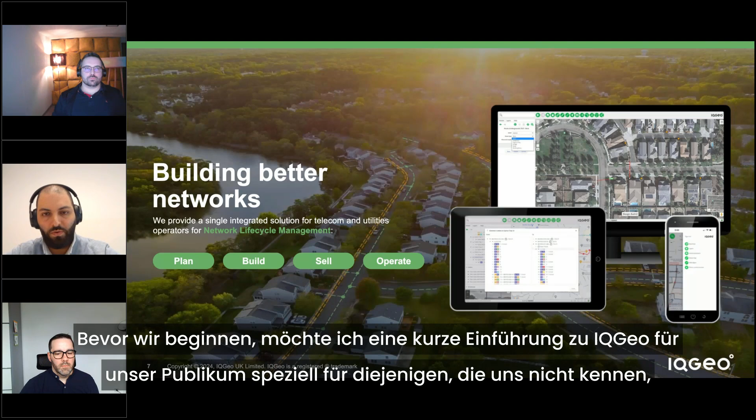Before we start, I would like to give a short introduction on IQGeo to our audience, specifically for those not familiar with us. Our vision is to empower operators and engineering services companies in the telecom and utilities industries to build better networks. With the innovative products we offer, a truly single source of truth on one platform, we cover the whole lifecycle, from planning and building to eventually selling services and operating the network. In numbers, we are proud to serve more than 450 customers with more than 150,000 users across our portfolio of products, and with more than 200 staff in 8 offices across the globe. Our global network of experts is always trying to find innovative ways towards building better networks.

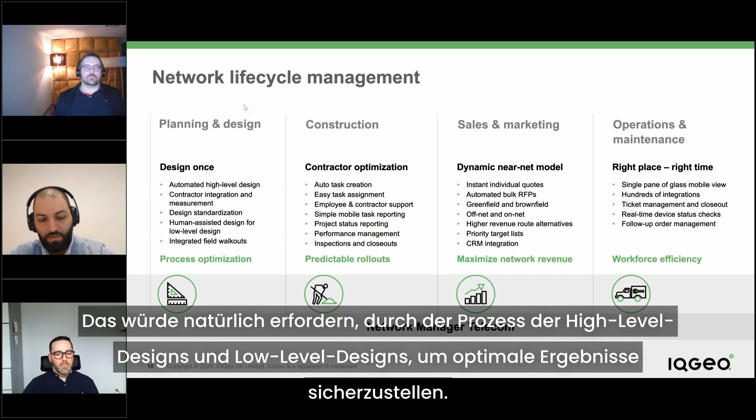When we talk about the life cycle of a network, we have different vantage points to consider. Starting from the plan and design stage, the drive is to, as much as possible, design the network once. That would require going through high-level designs and low-level designs to ensure optimal results, essentially creating a network that can be built as effectively as possible.

Transitioning to the construction stage, having predictable rollouts in collaboration with contractors will ensure a speedy and efficient build, and most importantly, accurate documentation of the network that was built. This will eventually enable the network to perform its main purpose, which is to provide services to clients and customers, maximizing revenue, which is key to operators.

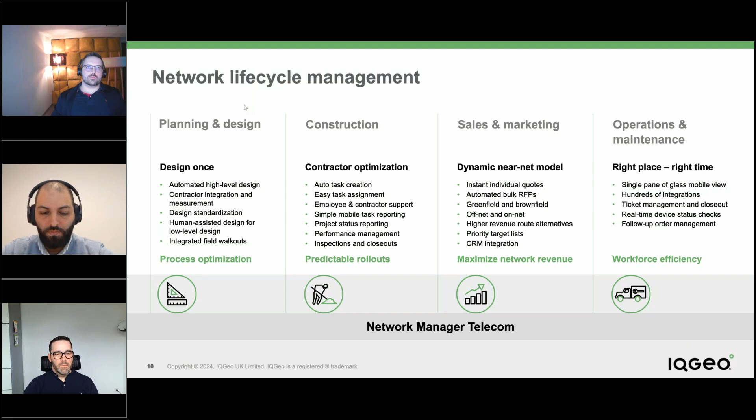And last, and most definitely not least, operations and maintenance are essential to keeping clients happy and benefiting from digital equity. For all those pillars, we at IQGeo have Network Manager Telecom. With that short introduction, I will pass it on to Jakob and Christian to take us through their presentation.

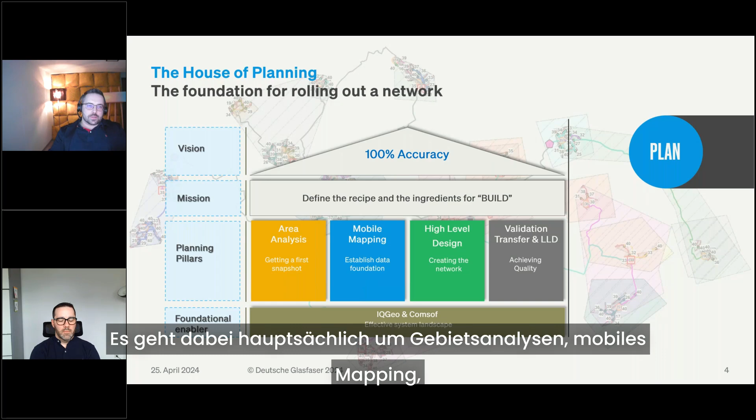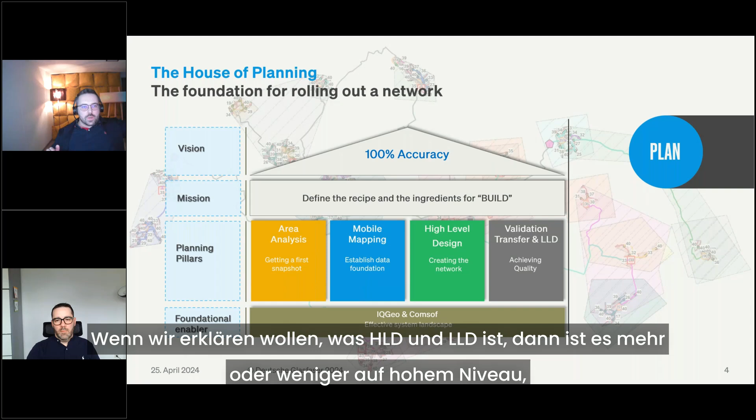It's mainly area analysis, mobile mapping, high-level design, and validation and transfer, and also the low-level design. When we explain what HLD and LLD are, it's more or less about the level of detail - HLD being high level, and LLD being a really detailed network plan.

But to build a house, a good foundation is needed. So we work with IQGeo and Comsof as a good, effective system landscape. Our main vision for this part is 100% accuracy.

Maybe one or another is asking, well, isn't that possible? Yeah, it may be possible, but through the process, a lot of stuff can happen. You have difficulties, adjustments in the network or other parts that hinder you in getting the accuracy. And maybe also the lack of digitalization in Germany is also one point.

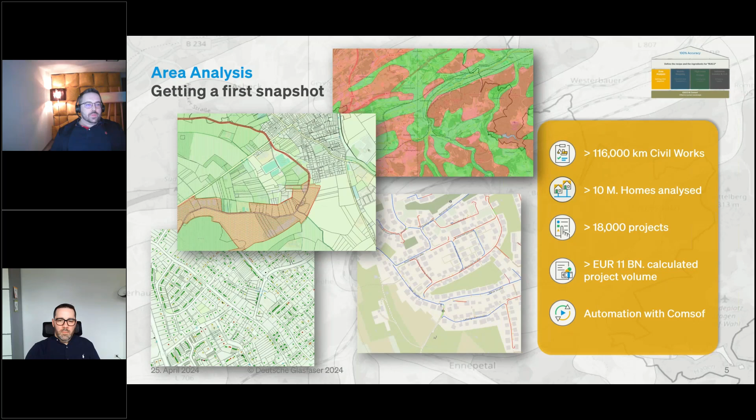But we operators do a lot to improve that where we possibly can. So what would we start with? Area analysis. What is useful to take a look into?

Here you see a few example pictures. It could be, for example, soil classes. Soil classes define the underground, and when we use, for example, horizontal drillings, it's really important to know and face the soil classes, because that can give a big idea of how the costs could be. Also important are natural reserves, water areas, or similar reserve areas, which can cause higher costs.

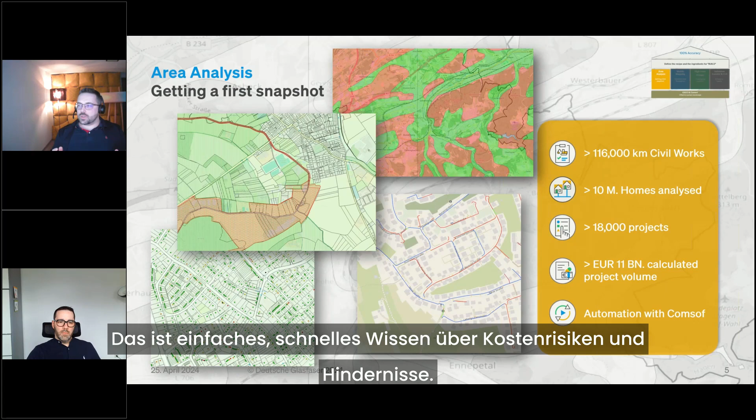And why are we doing that? That's easy - fast knowledge about cost risks and obstacles. So we have a first rough idea of whether we want to go into that region or not.

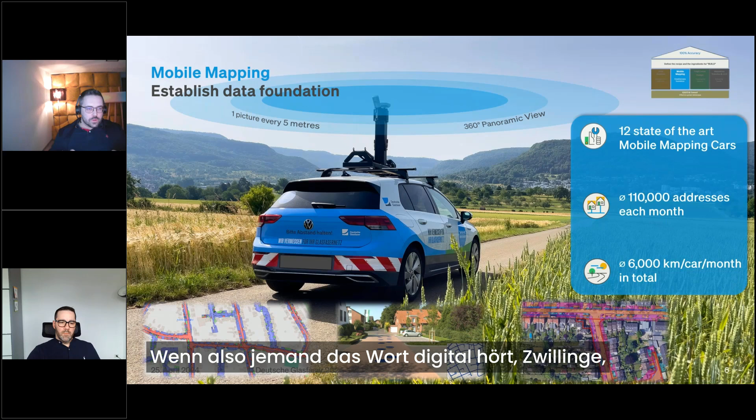Mobile mapping: with our 12 cars, we are creating terabytes of data. When you drive around 6,000 kilometers, the disk is full pretty fast. And maybe if someone heard the word digital twins, we can create a digital twin with that data to gain precision in our network costs.

For example, the knowledge about the surfaces, you can see an example picture, can give an idea of around 80% of the costs of deploying a network. So really a big amount to already have a picture of.

You can also use the data to build artificial intelligence, recognizing this and even more, like gas line locations, sewers, and other obstacles, which help determine more extra costs. Why digital twins? The possibility to take all needed field data into consideration without going there several times in the process chain.

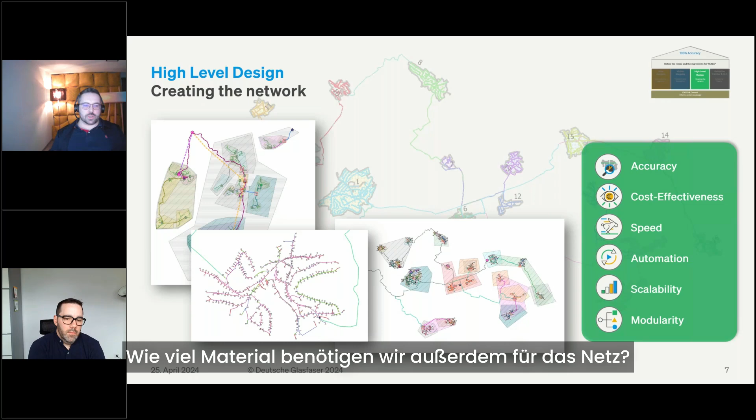High-level design: now we start using that data. We want to have the idea of the material list, like a bill of material. How much material do we need for the network? One aspect was the civil works.

Now we go into detail. I learned about different ways of processing HLDs, and in the past, my personal choice is really doing it automatized in-house. We have, as I mentioned, the foundation with Comsof and IQGeo.

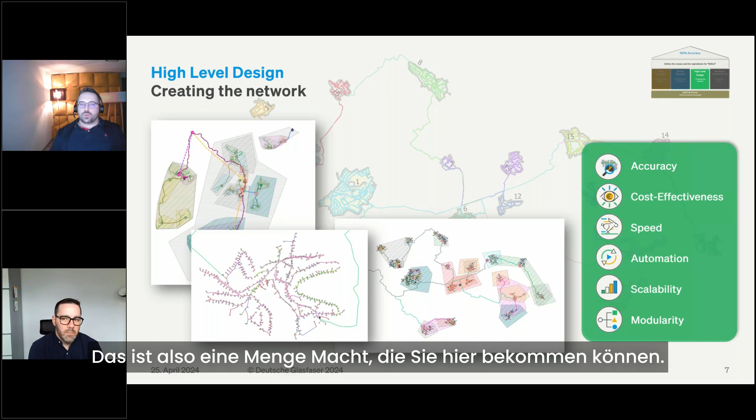With good software, you can set the rules how you want it in a modular way. You can scale your output efficiently and gain speed based on your goals. But you still have the possibility to try several versions of a network if needed. So that's a lot of might you can get here.

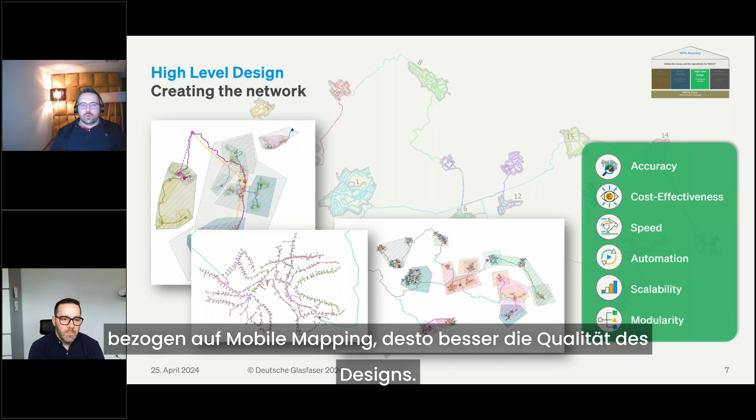Lots of manual work is not needed anymore. And the better the input data, referring to mobile mapping, the better the quality of the design. So why high-level design? It's an automated way to use collected data as input and generate a really good first estimation of the price for a project.

Going to the last part, validation and transfer. While going into the rollout direction, we implement last details to the design, which were not necessary in the early status. And to keep it simple, we use Comsof and IQGeo to transfer the data quite seamlessly. That is also a big advantage, not having to work with several interfaces between several systems.

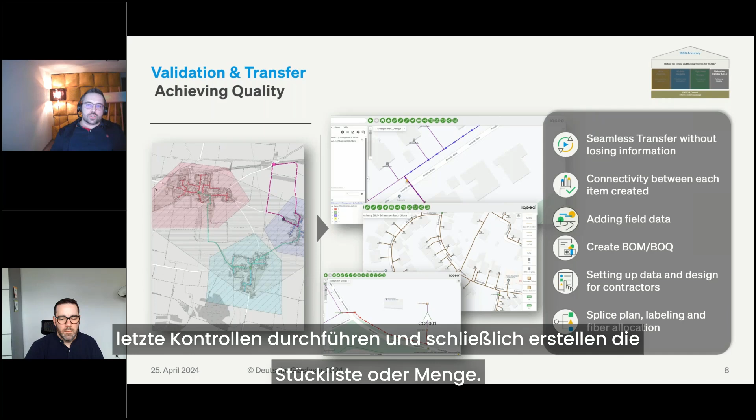We can add field data here, like third-party infrastructure, making last checks, and finally create the bill of material or quantity. That's nothing more than, let's say, the ingredients for the FTTH network. So why validating? Having a last checkpoint for quality and adding details is necessary.

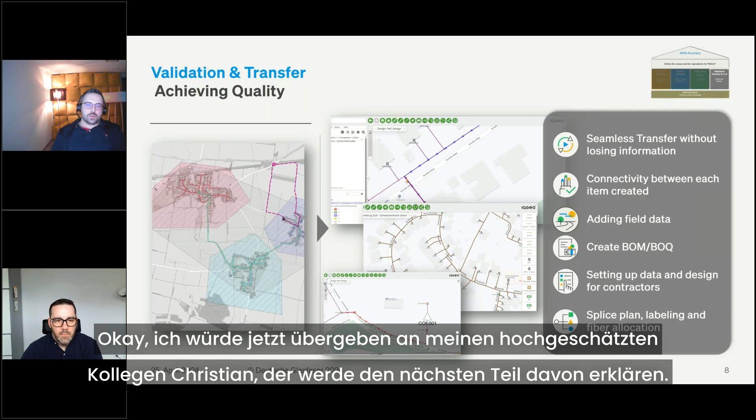So I hope I explained the first house of planning relatively okay. I would hand over now to my highly esteemed colleague, Christian, who will explain the next part of it. And of course, feel free meanwhile to already put in your questions if you have any.

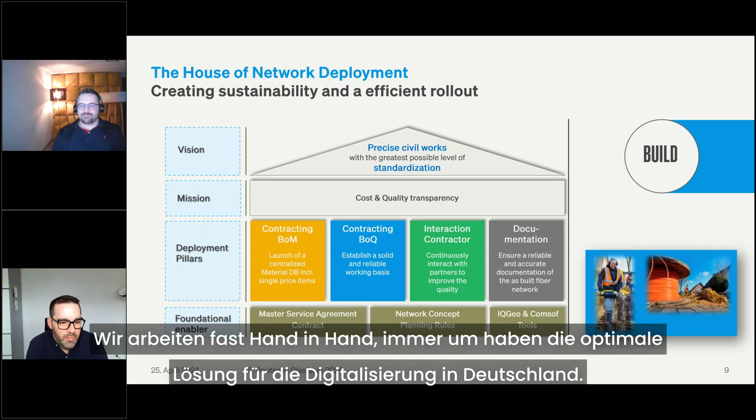Yes, thank you very much, Jakob. We are working nearly hand in hand, always to have the optimal solution for digitalization in Germany. And by having a good plan, which Jakob showed, we have to deploy it. The way we want to deploy it in Deutsche Glasfaser has completely changed in the last years.

Our vision is to have precise civil work with lots of standards. The mission is to have a cost and quality transparent network built. We have 4 pillars here. Jakob mentioned that we will have the ability to have a BOQ and a BOM.

We know which quantities of civil works we need in detail, where and how many, and we also know it on material. That's a main important aspect. It's a big benefit from IQGeo, which we are using right now.

We have a passive material database, which will be shown by Anthony afterwards. It describes not only, for example, a 96 fiber cable, which Jakob is planning, but also the cost for having the calculation on how much it costs to have the network rolled out. And we will also have things like data sheets, how to handle it, installation manuals for our contractors directly linked in this tool.

And we have the attenuation values, which show what is the whole attenuation between your active POP, for example, and the customer, to have a look at whether the technology you want to provide on this network fits.

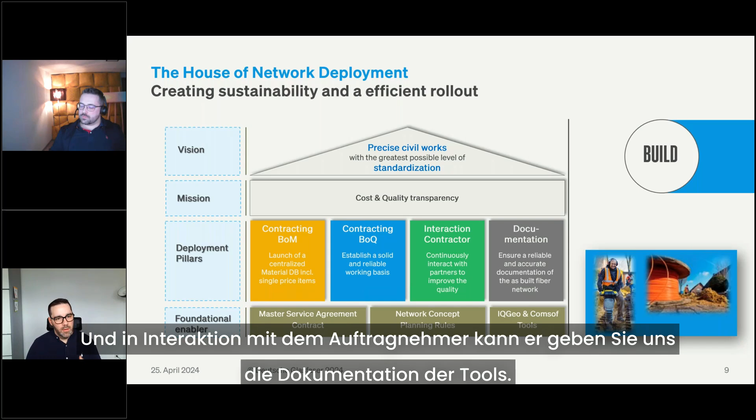We can place orders for the projects based on that and interact with the contractor. He can give us the documentation out of the tools. We don't need extra employees at our general contractor going on site to do documentation. It can be done by the people on site with a tablet, and they have AI-based checks, validation, acceptance checks for Deutsche Glasfaser, which makes it very easy for the general contractor and Deutsche Glasfaser.

And we save a lot of capacity of people to do on-site reviews or reviews of documentation which has been handed over. We have several rules for our network concepts. For example, in Germany you have state aid projects for open access. Then we have B2B customers, B2C customers, mobile sites.

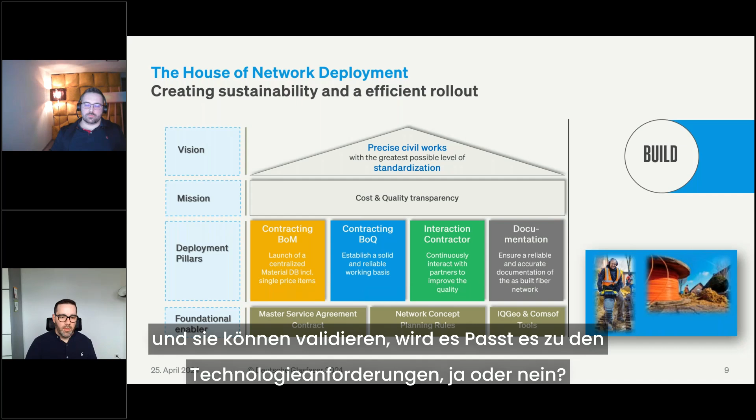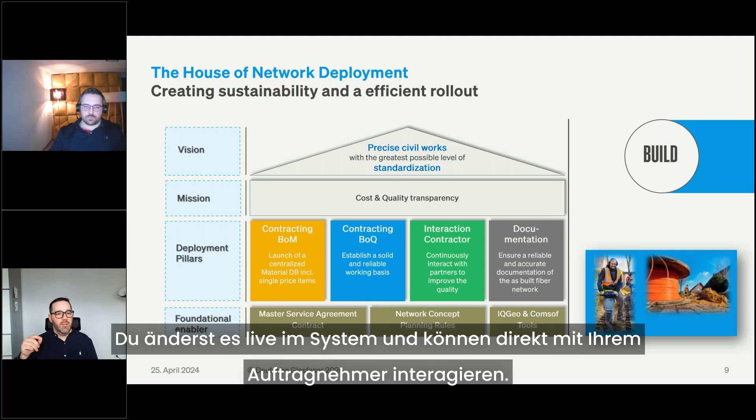With all these planning rules, Jakob is able to plan together with his teams the perfect solution, and they can validate whether it fits technology requirements, yes or no. And when there is a small adjustment, for example in the low-level design phase, the municipality asks you to go on the other side of the street, you can change it live in the system, you don't have to change it manually. You change it live in the system and can interact with your contractor directly. That's a real benefit as well.

That gives us a very good base of documentation after having all these acceptance tests, to go to the house of network operations. In network operations, when you have your documentation of the network, you have all the values of how the network should look like. You have your acceptance test and the optical test patterns, which Deutsche Glasfaser is rolling out right now, to have a live view on each fiber, to have all the values available.

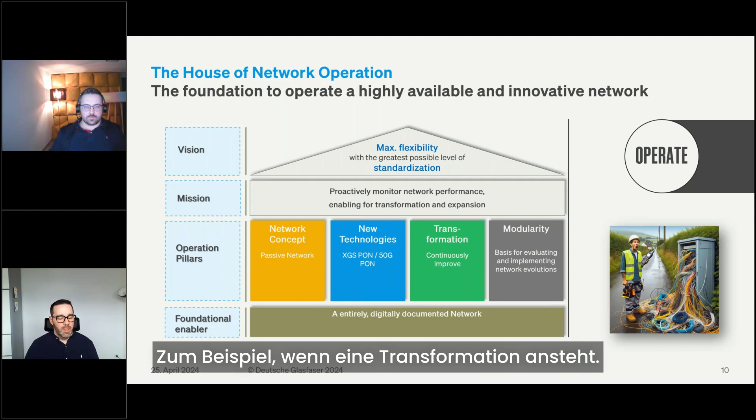You see the life cycle of the cables, you see the life cycle of all the connections you have in your network. And you're able, together with this data, to check for new technologies. For example, when a transformation is coming - in the past there was GPON, right now there's XGS-PON, maybe next is 50G-PON - you have a database which gives you the correct information on what is feasible in this network.

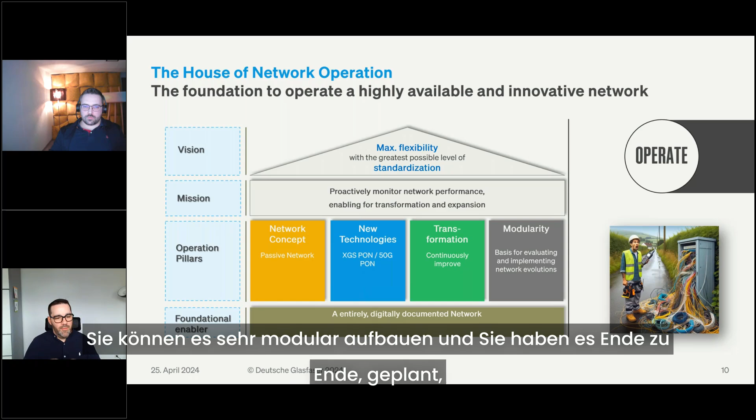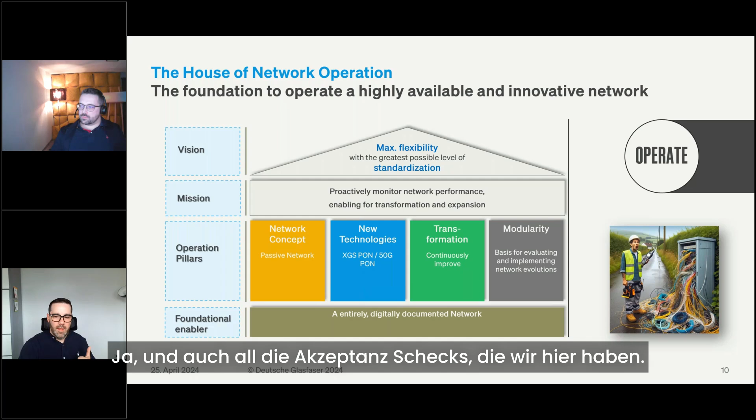And so you can continuously improve your network, and you can build it very modular - again state aid, maybe B2B with point-to-point solutions, mobile sites. You can build it very modular, and you have it end-to-end planned, documented, and it's the base for operations within one tool. Main enabler is the database of the material for us, and as well all the acceptance checks which we have in here.

Jakob, which lessons have we learned during the introduction of all those fancy things? Maybe we picked 4, I guess there are much more, but 4 of what we think are very important.

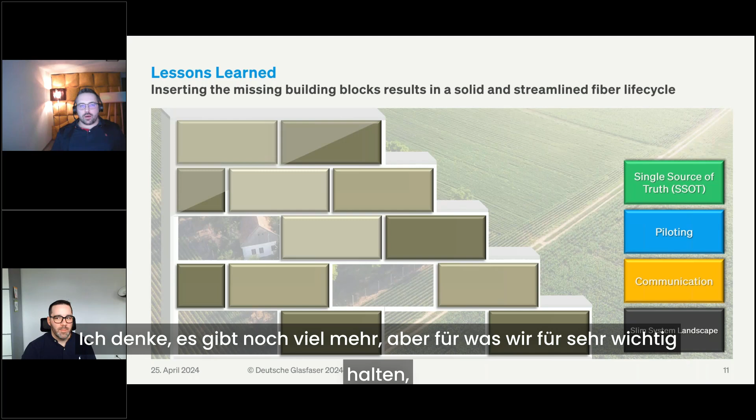Maybe let's start with a single source of truth. So what we have learned is you can do stuff with a lot of systems and it can work, of course, but what can always be hard to track is keeping data on one point. So it is good advice to look for systems or software tools where to save the data, and better to work with interfaces to just show it into other areas of the company.

For example, I give you an example for state-aid projects. It may be that you have to add addresses, it may be that you have to cut them out again, and so you have several versions of a design. So single source of truth really helps to gain transparency, to not work with the wrong data, and that is one aspect we would say as a lessons learned that you should try to set up.

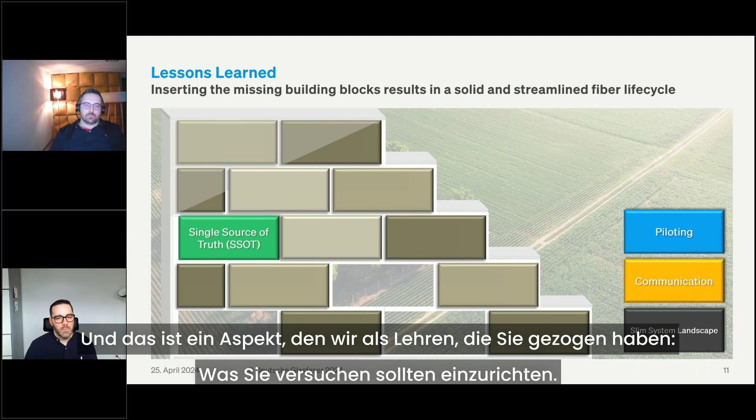So maybe Christian can say something about communication. Oh, that is the wrong stone. But okay, yeah, but I can also say something about communication.

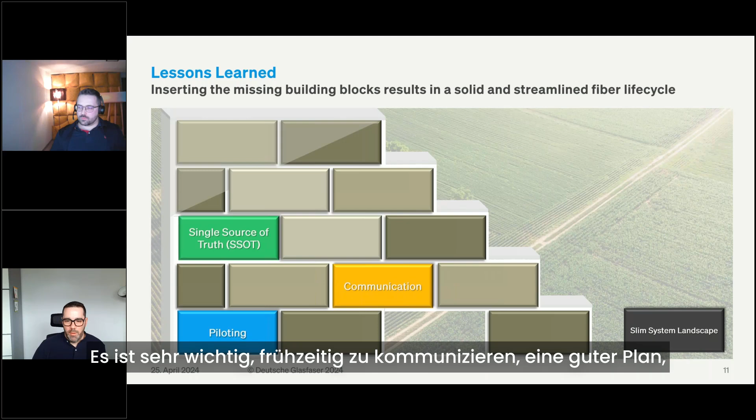What is very important is to have a good setting of information. There is a main important thing: to have a good information workflow. It's hard to maintain production while developing many systems. That's very important - to communicate early, to have a good plan, to have a workflow for the development and afterwards releasing the new systems and processes.

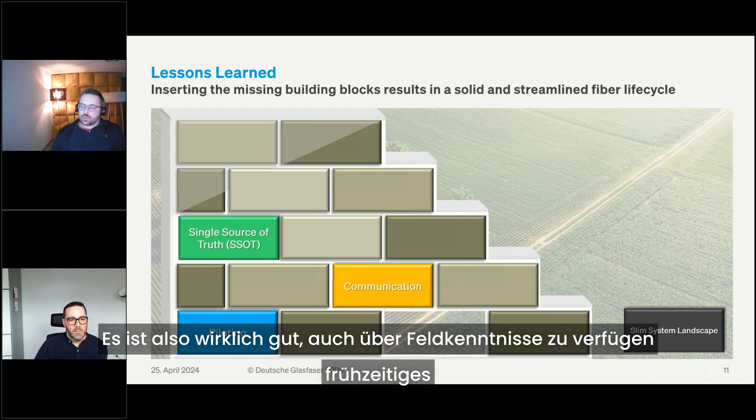I will take the brick piloting. Piloting can be really crucial to gaining experience out of the field. On paper everything can work totally fine, but then you go outside and see issues you've never seen before. So field knowledge is really important.

It's good to have early feedback and reapply it into the new process. And like mentioned with single source of truth, a slim system landscape can help to have fewer interfaces, be more effective, and manage accessibility for third parties like contractors better. A simple process chain with fewer translation steps really helps. We call it an end-to-end solution.

It really helps to have an overview of what you are doing. And yes, it costs time to apply that, because in the last years a lot happened and we got a lot of software and developers providing that.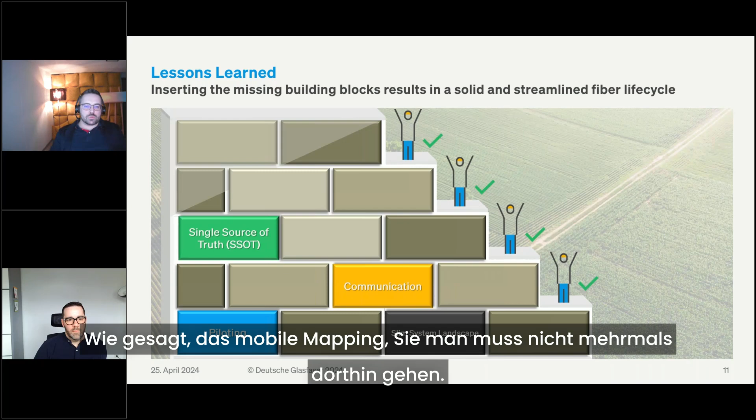So maybe more benefits could be no manual reviews of construction results. Like we said with mobile mapping, you don't have to go there several times, so no additional site visits. Documentation is really important for project acceptance and payment processes. Process improvements by real-time availability within the IT landscape.

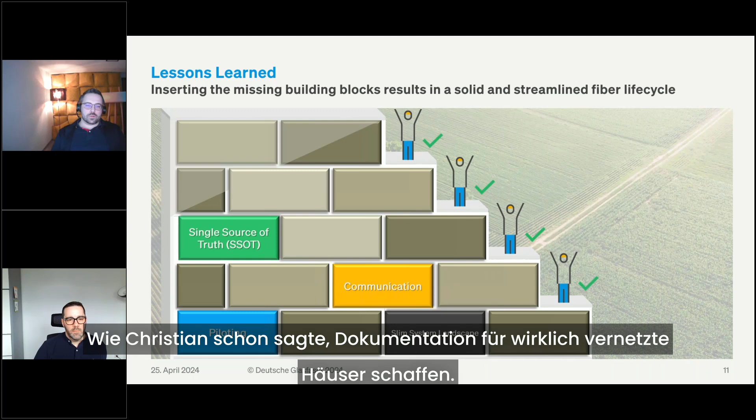Benefit for state aid projects: there's a high degree of quality needed, and accurate documentation for really establishing homes connected. Christian, maybe you have a point or two more, but at the end, having the documentation in the right way is very important, because everything that happens in the ground, what's laying in the ground, is the main asset of Deutsche Glasfaser.

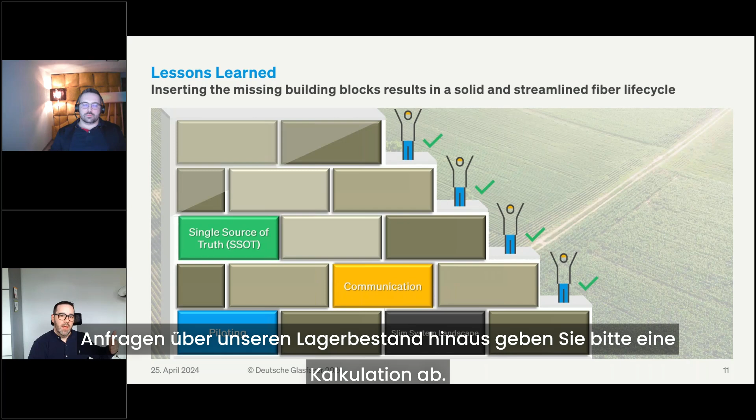It's not only about operating the network; it's also a kind of space for our sales guys. It's the base for sales to have a view on our available capacity. And it's very simple for Jakob and team to plan or give calculations for inquiries beyond our inventory. It's our main asset, so it's very important to have it documented correctly and to have a view on how you can handle it.

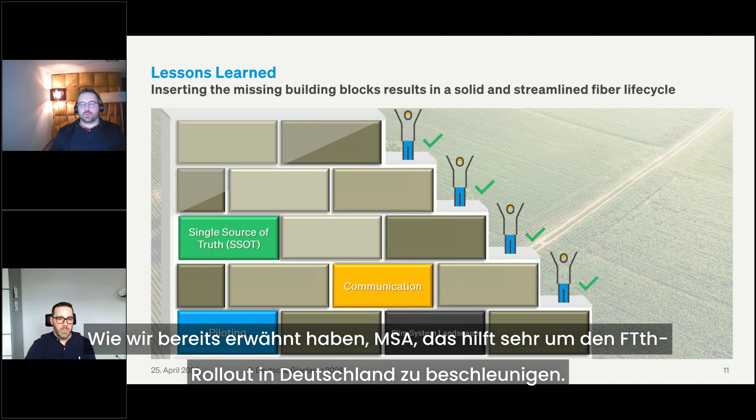A clear contract design leads to clarity for all contractual partners. Like we mentioned, the MSA helps a lot to speed up the FTTH rollout in Germany. So I hope we could give you a nice insight into how we are approaching this topic.

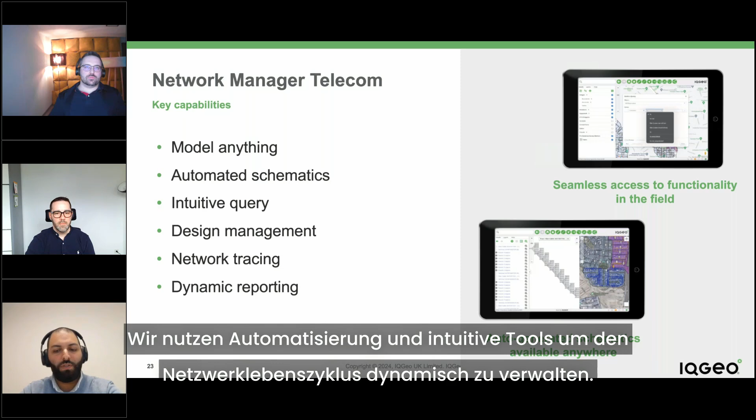What I learned is that without solid building blocks, any house would certainly collapse. So we've seen with Deutsche Glasfaser how Network Manager Telecom is being used as an enabler to streamline and optimize processes and activities, essentially using the ability to model anything. We leverage automation and intuitive tools to manage the network lifecycle dynamically.

Without too much more to add, I will transition to the demos we've prepared for you today. Taking the three stages from Deutsche Glasfaser's lifecycle - plan, build, and operate - we will see how we can optimize design scenarios, streamline build documentation, and resolve incidents in a rapid fashion. So I will switch to my demo screen.

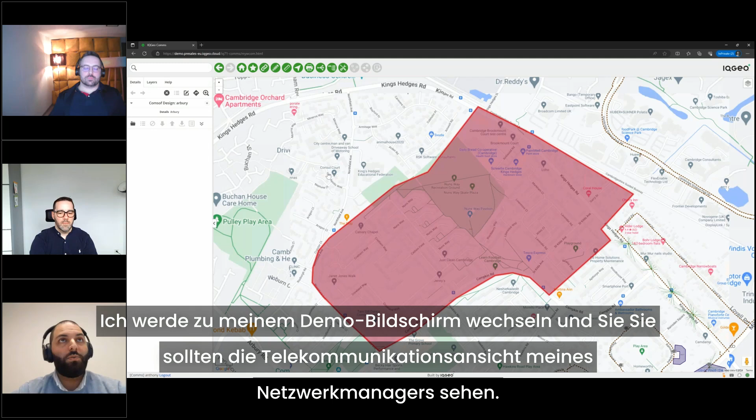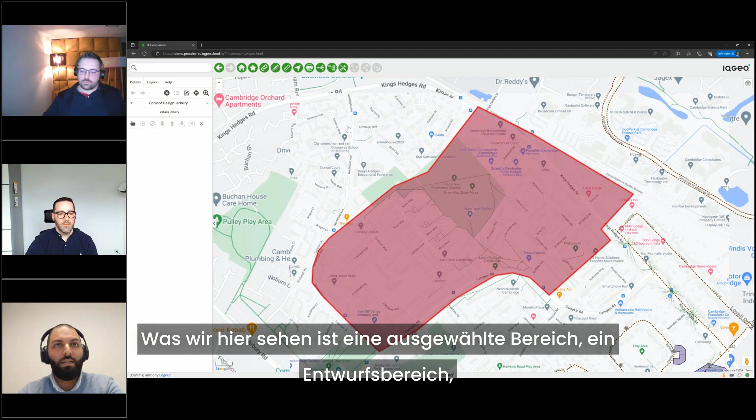You should be seeing my Network Manager Telecom view. This is essentially our inventory system, our documentation system that we offer to operators. What I'll present through the first demo is a view on how you can potentially optimize designs and design scenarios. So we're looking at a selected area, a design area, represented as a design object in Network Manager Telecom.

Within this design object, we are able to create local versions of the design by taking a copy of the master dataset, and through that copy, planning and building a new FTTH network through the automation provided by the Comsof Fiber engine. So in this example, I will open up my design.

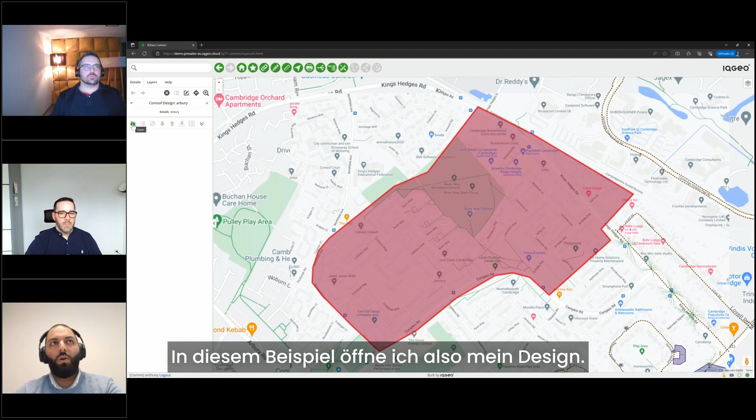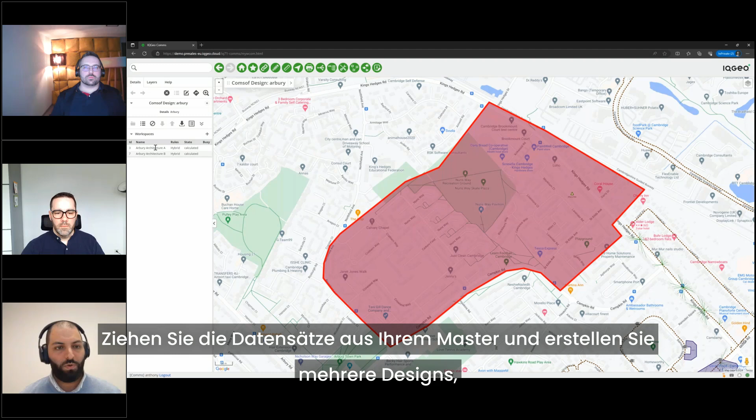I have prepared two workspaces within that design. The indication of that is you are able to pull the data sets from your master and create multiple designs to streamline the ability to compare these different architectures or deployment methods, for example, using the automation in Comsof Fiber. So selecting one of these architectures, I am able to open up my design.

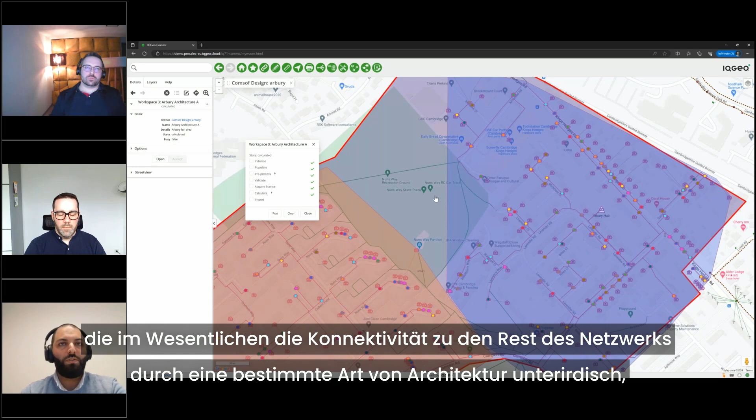You can see my screen is populating with the actual design elements. In this specific area, I have a point of presence that is essentially providing connectivity to the rest of the network through a certain type of architecture, underground, with trenching, with fiber cable that are directly providing connectivity to end customers.

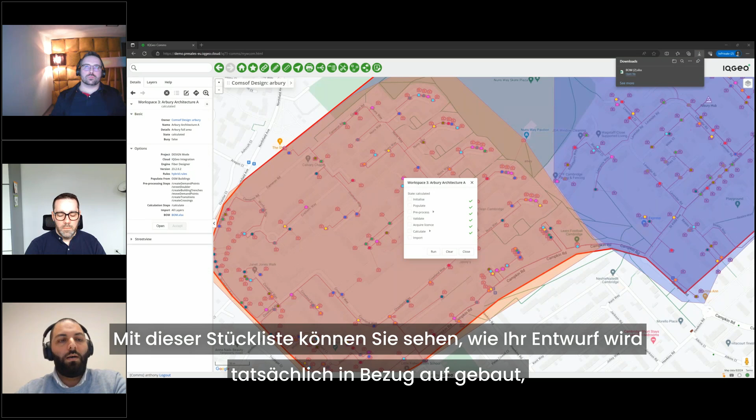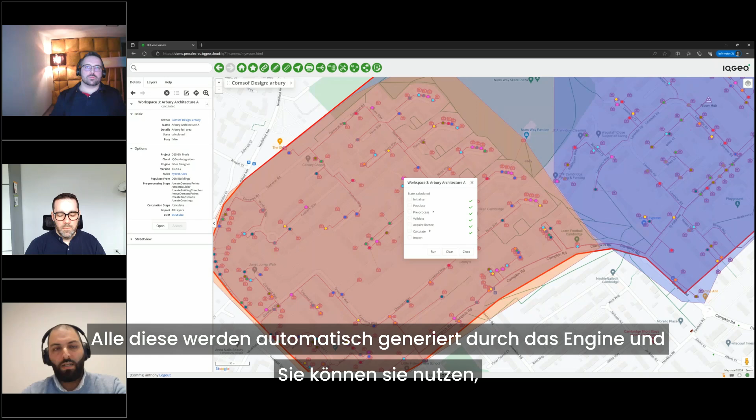In addition to the automation that will create that design for you, you are able to, as Jakob and Christian mentioned, generate automatically a bill of material. With that bill of material, you can see how your design will actually be built in terms of actual costs for deployment and actual costs for activation. All of these are generated automatically through the engine, and you can consume them to understand how that design will be broken down.

This is an overview of how that bill of material can look like, with a summary giving you the total cost of the project, and with a deep dive into how that project is being built, all the different materials that will be used, from ducts to cables to splice closures, manholes, handholes, etc., up until activating customers with CPEs or equipment, MDU equipment, etc.

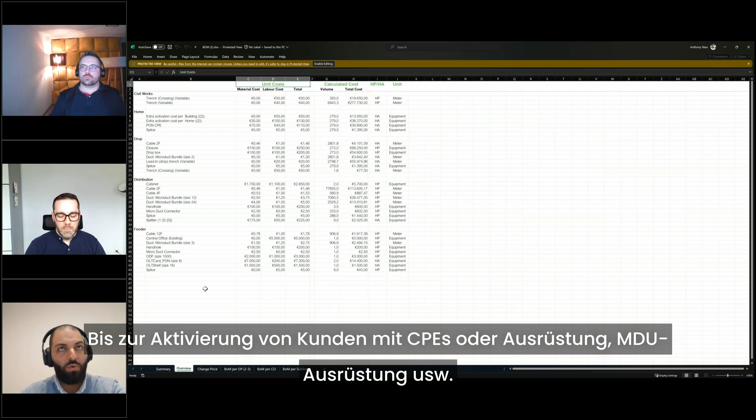So now going back to Network Manager Telecom, this is one version of a design that could be planned to provide service for this specific area, but we can certainly look and compare against a different version. If I open my second architecture or second example, you can see that I have a different design.

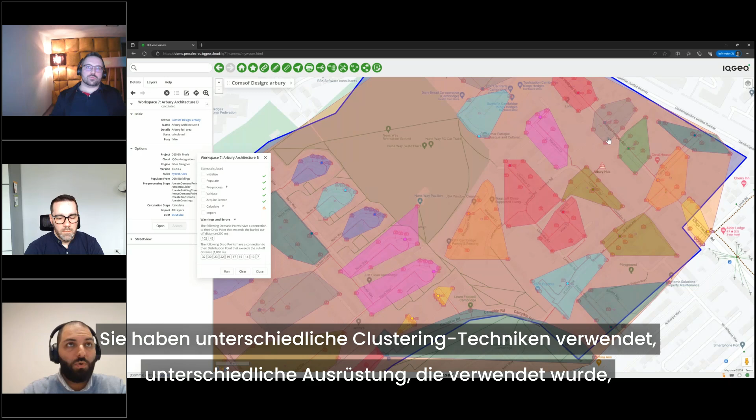Starting from the same point of presence, you have different clustering techniques that were used, different equipment that were used, and this will eventually, of course, lead to a different bill of material that is generated.

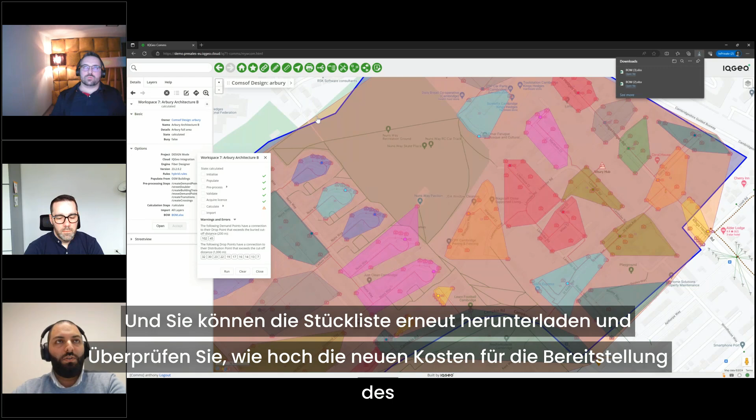You can, again, download the bill of material and inspect what is the new cost to deploy that new network based on the new architecture or based on the change of the rules that you've done.

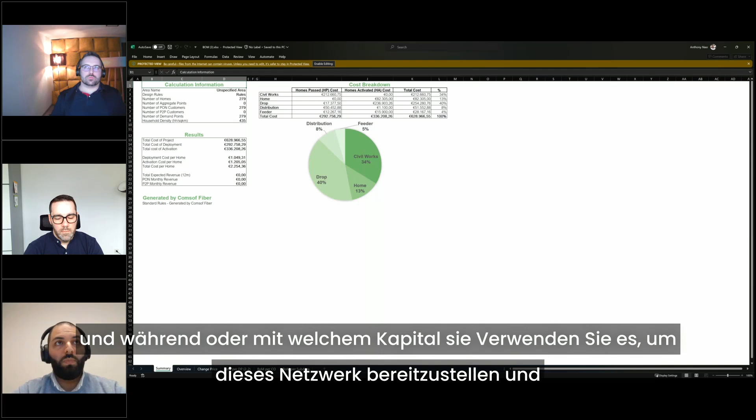So you can easily, with multiple iterations, look at different scenarios, look at how your plan and design phase will impact the actual build phase, and give all that intelligence to the construction crews so they know what to expect. You know what your contractors will be building and using what kind of capital they would need to deploy and build that network.

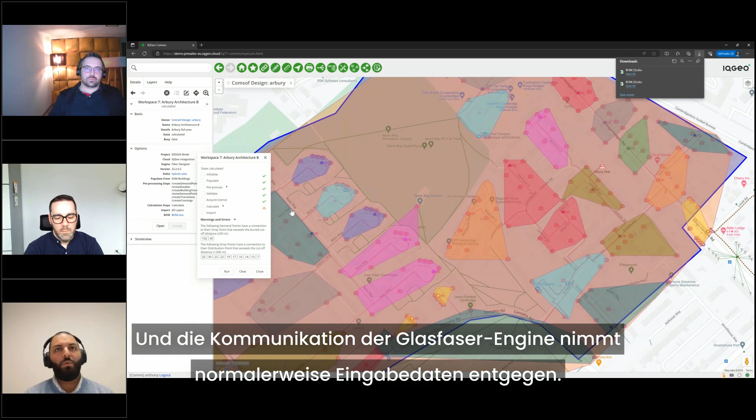So going back to Network Manager Telecom, what is enabling the designer or the planner to use this functionality is the Comsof Fiber Engine. And the Comsof Fiber Engine will typically take input data, and in this case, the input data is being read directly from Network Manager Telecom.

We're reading the addresses that we want to connect to. We're reading the potential streets that we can trench into. And from those data sets, we're automatically creating the needed data sets for the calculation.

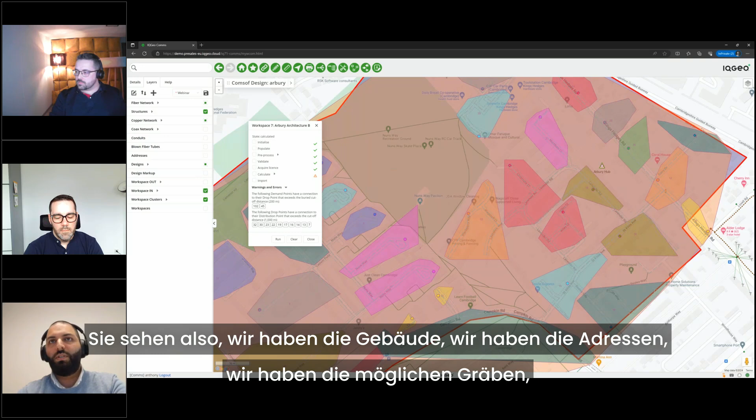So I can quickly switch to how this would look like from an input perspective. You see we have the buildings, we have the addresses, we have the possible trenches that were generated automatically by Comsof to drive that automation.

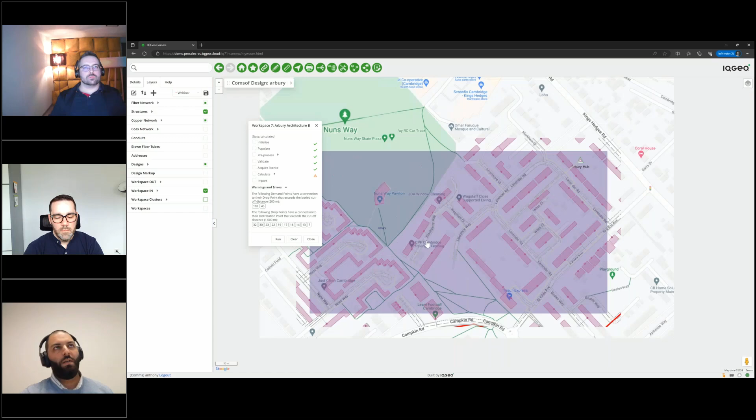So this is the first quick demo of how you can streamline planning and designing. We'll transition now to how you can efficiently document your network. So I will switch to a different view of Network Manager Telecom, and this is my mobile view.

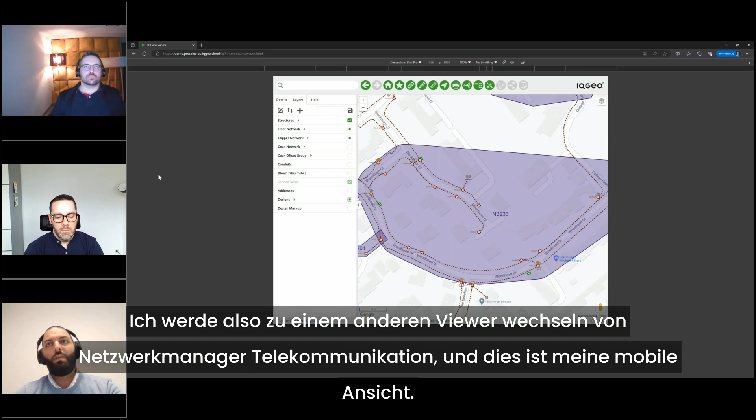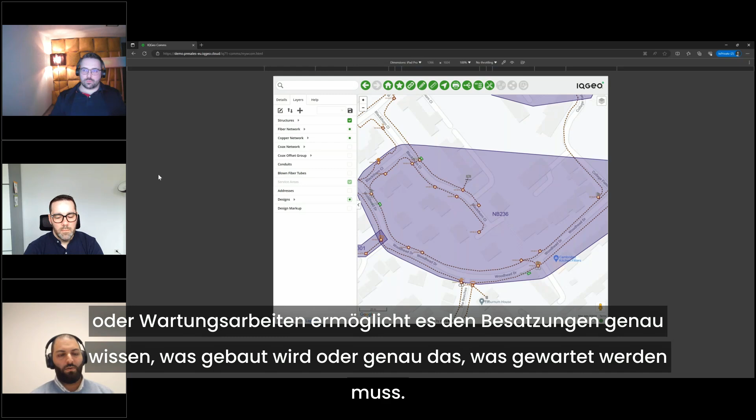Whenever you have a connected device, if you log into the software using your credentials as a field user or as a desktop user, as long as you're connected, you have the same interface, you have the same functionality available to you. This enables the field crews, whether they're doing construction work, operation, or maintenance work, to know exactly what is being built or exactly what needs to be maintained.

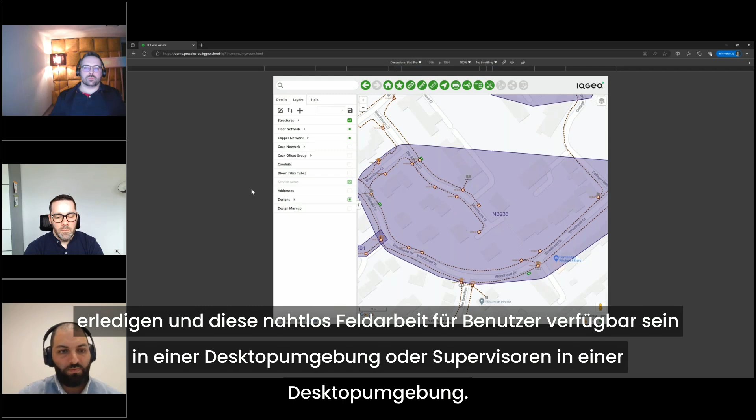So in this quick scenario, we'll see how you can leverage the functionalities in Network Manager Telecom to do field work and seamlessly let that field work be available to users in a desktop environment or supervisors in a desktop environment.

So in this simple scenario, we have again a design object, and in this design object, which is representing an area to be built, you can see I have objects that represent, in this case, a manhole. I can look at this manhole. On my mobile device, I can see how connectivity is created in this specific manhole.

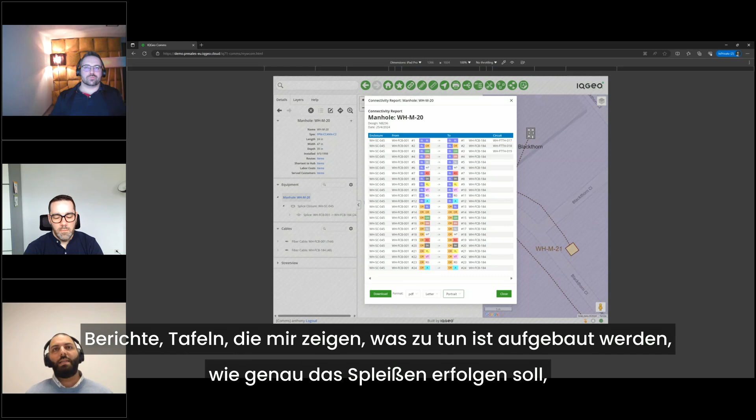I can pull up seamless reports, connectivity reports, circuit reports that showcase to me exactly what needs to be built, how splicing should be done, which strands from which cables will be spliced to which strands from which cables again. All of this is available through the interface.

Now, in addition, while you're doing construction, it's very important that you document the network as accurately as possible. We know construction work will have deviations from the actual plans and builds. This is the reality of deploying networks, so it should be simple to capture these redlines, to capture the reality of the network that is built.

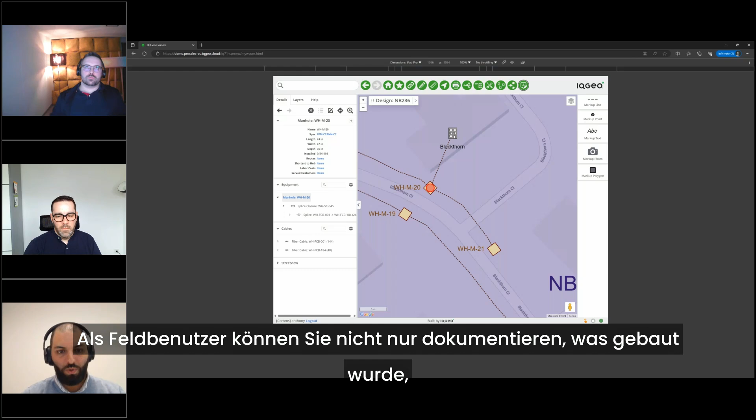Looking at the markup palettes, for example, which are tools available through our interface, as a field user you're able to not only document what was built, but also propose or even change the actual objects that were built in the ground and reflect that back in the office.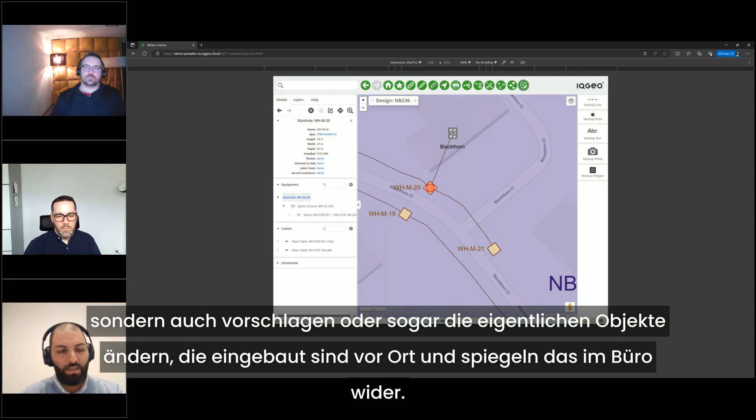Using the tools we have, we're documenting that we've created or established this manhole in the field, and created the connectivity required in this specific manhole. So we have a closure, and within that closure we have multiple cables incoming and outgoing, and we're splicing them. We can create that markup, add it, and attach it.

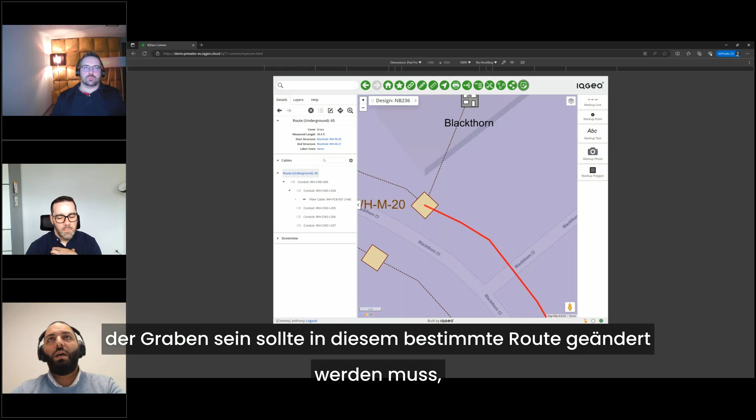In addition, say you have a case where the actual route or trench that was supposed to be trenched has to be changed. You can create a corresponding markup line for it in the field using the path that was actually built. By creating this path, this is the path that was actually built for the object, and it's already related to the route you had as a plan.

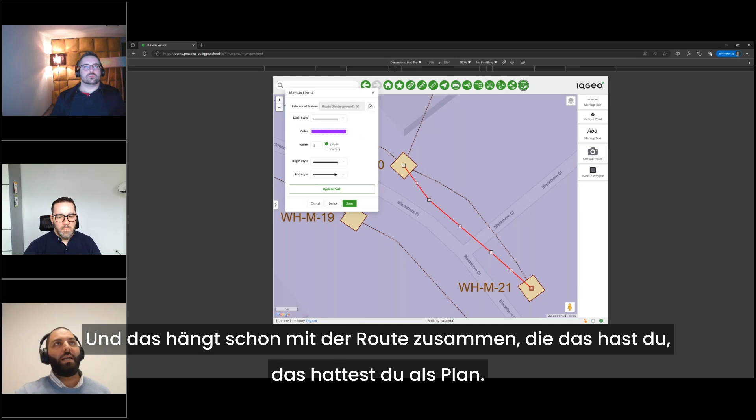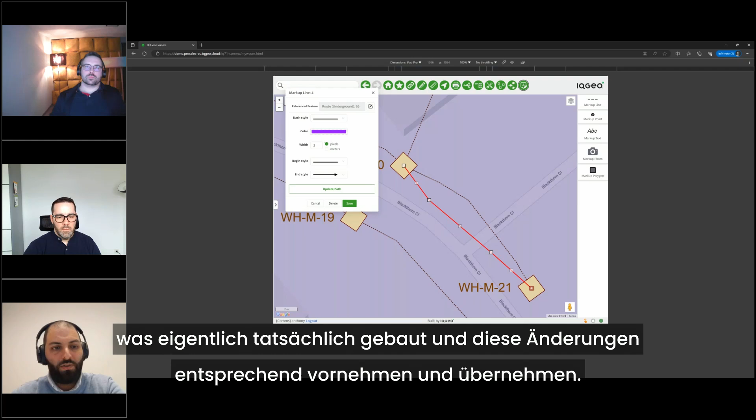Now what would this trigger? This will trigger the desktop user to go inspect what was actually built and adopt these changes accordingly. We have multiple other options for markups, but this is typically what happens when you do redlining.

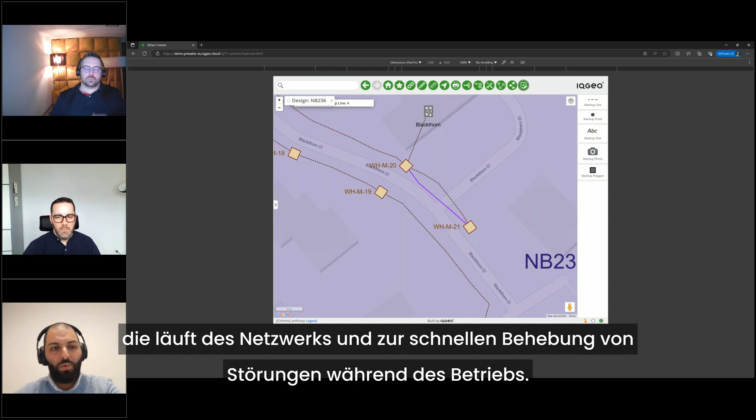With that, I'll switch to the last quick demo for the session today, which is operating the network and rapidly resolving incidents during operations. I'll switch to a different area where we have some established networks and established connectivity for users.

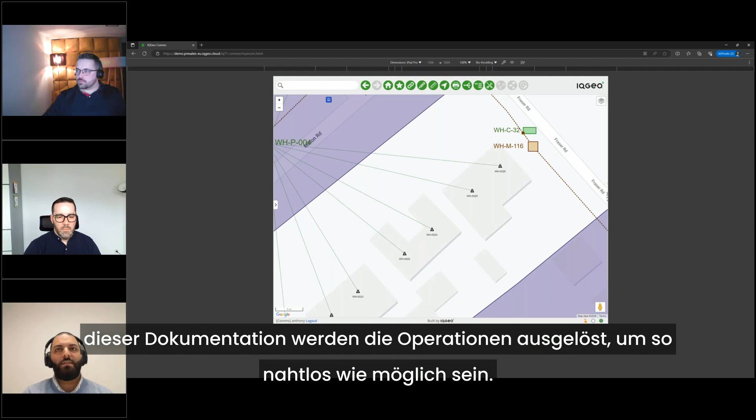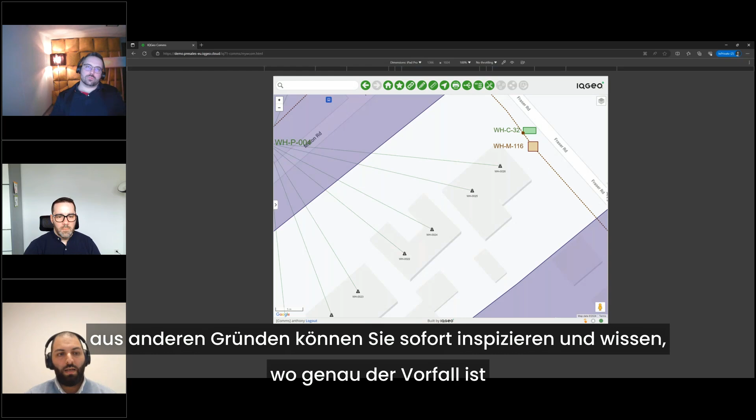We stressed the importance of having documentation of the network, and the accuracy of this documentation will trigger operations to be as seamless as possible. So whenever you have incidents with customers complaining, for example, that they have loss of connectivity or for any other reason, you can immediately inspect and know exactly where that incident is happening in your network and how you should handle and fix it.

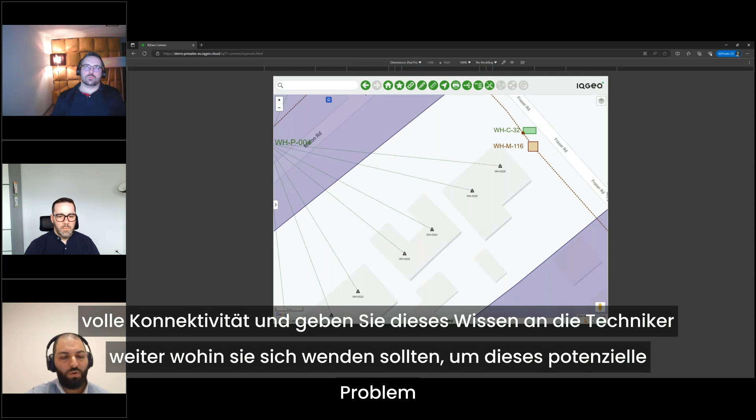The Deutsche Glasfaser team talked about having optical test heads, or even if we're not relying on optical test heads, if you go to the field and do OTDR traces to know where you have drops in power for an optical signal, you can seamlessly go back to Network Manager Telecom and get that full trace and full connectivity, giving that knowledge to the technicians on where they should go to repair that potential issue.

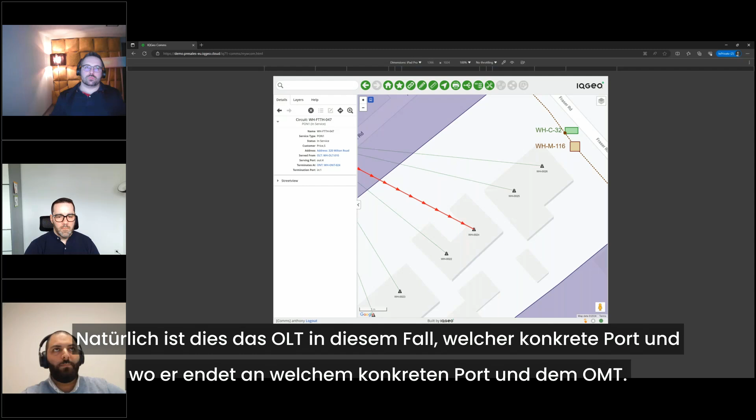Very quickly, suppose I have the following customer, connected through the ONT with one fiber strand. You can see I have a circuit, and that circuit represents what service is currently given to that specific customer. You can look at that circuit from where it starts, in this case the OLT, which specific port, and where it terminates, on which specific port in the ONT. Now suppose we've received a complaint from this customer that there are issues with its connectivity.

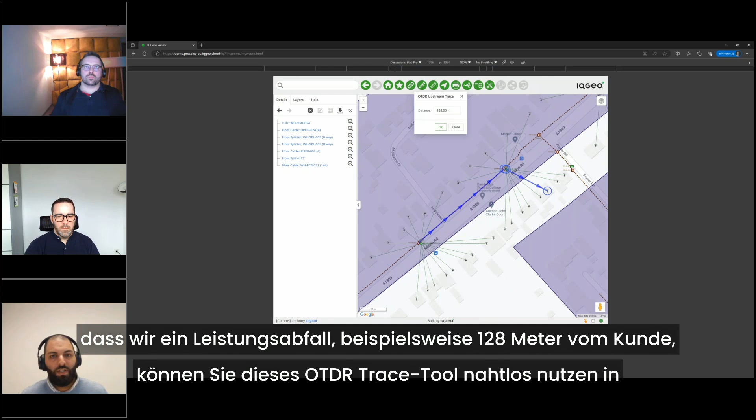So in order to locate the issue, whether with the optical test head or with OTDR traces, assuming we know we have a drop in power 128 meters, for example, from the customer, we can seamlessly use this OTDR trace tool in both directions, upstream or downstream, to locate the potential location where the fault has occurred.

Looking at this location, we see potentially that we might have an issue in a manhole or in the fiber cable incoming to this manhole. So we can know, through the mobile interface, by selecting and looking at the connectivity report or circuit report from this manhole, what other potential customers might be affected by this issue.

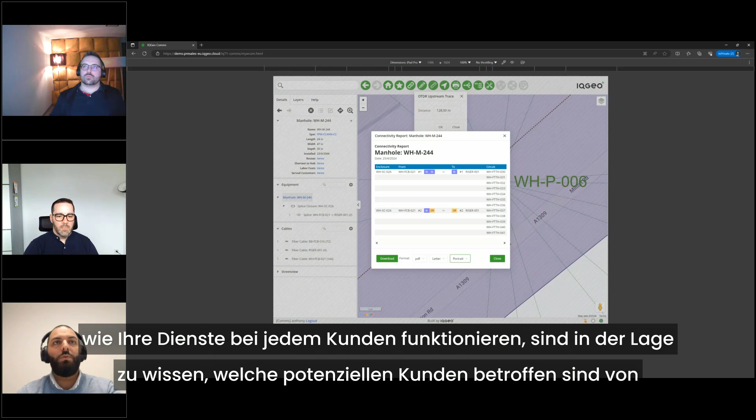Specifically, if there's a fiber cut in a fiber cable, because you have documented the network properly and you know how your services are running against each customer, you are able to know which potential customers are affected by these issues. By pulling a connectivity report or a circuit report, you can know which customers have been impacted even before they raise the flag. This makes it easier for the technician on the ground to know what needs to happen to resolve that fault. Pulling the connectivity report, they can fix the issue by resplicing to an active fiber and reprovide connectivity to the customer.

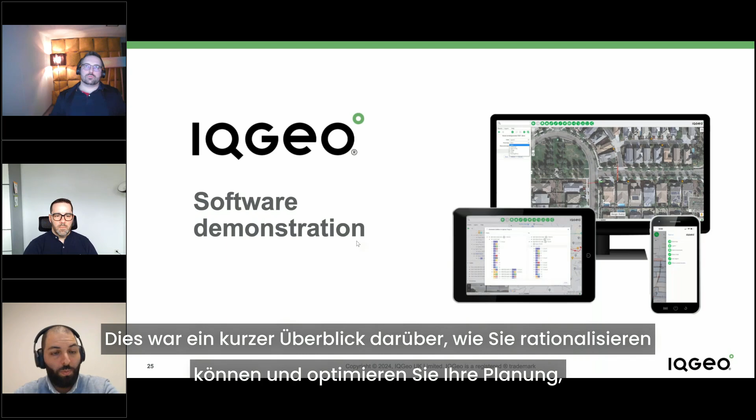With that, I will switch back to the PowerPoint presentation. This was quickly an overview of how you can streamline and optimize how you plan, how you build, and how you operate your network with Network Manager Telecom.